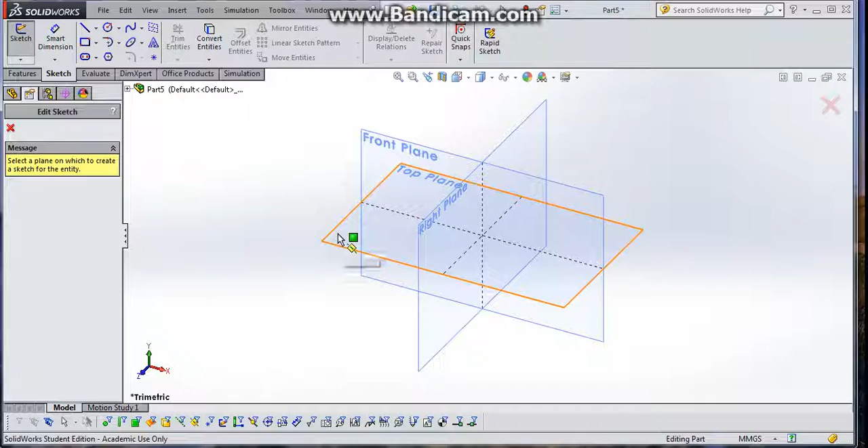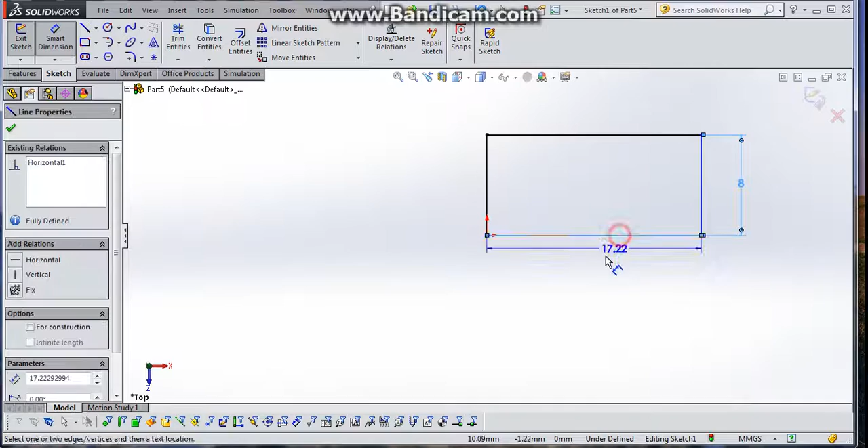We're going to start a new sketch, and we'll sketch on the top plane. We'll start with a rectangle. Corner rectangle is fine. Always have one corner of your rectangle on the origin here. So click, make a rectangle. Use the Smart Dimension tool to make it 8 by 15.8. Exit your sketch.

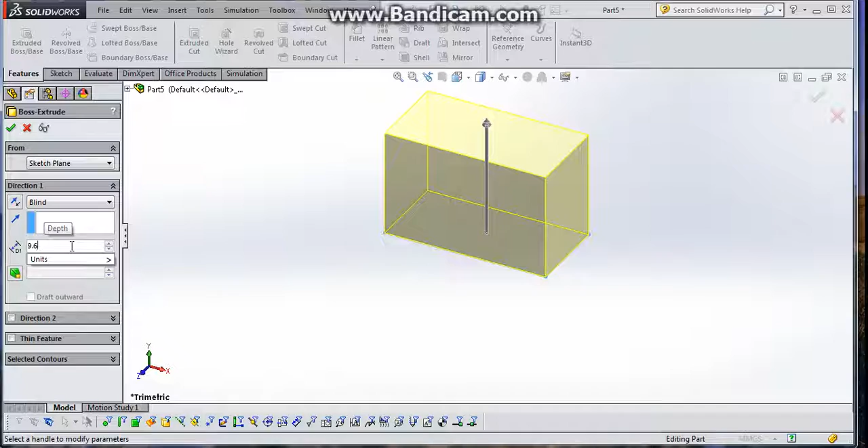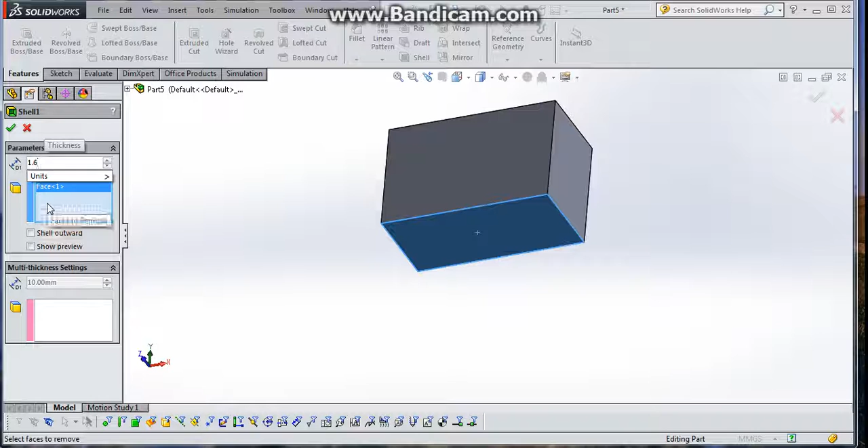We now need to make this into a block, so go to Features, Extruded Boss Base, and this needs to be 9.6 millimeters tall. Now we have our block. We need to shell this, so rotate your model so that you can see the bottom of it. That's the bottom. Use the shell command. Click that bottom face, and the shell thickness is 1.6 millimeters. And you can see it's now been shelled.

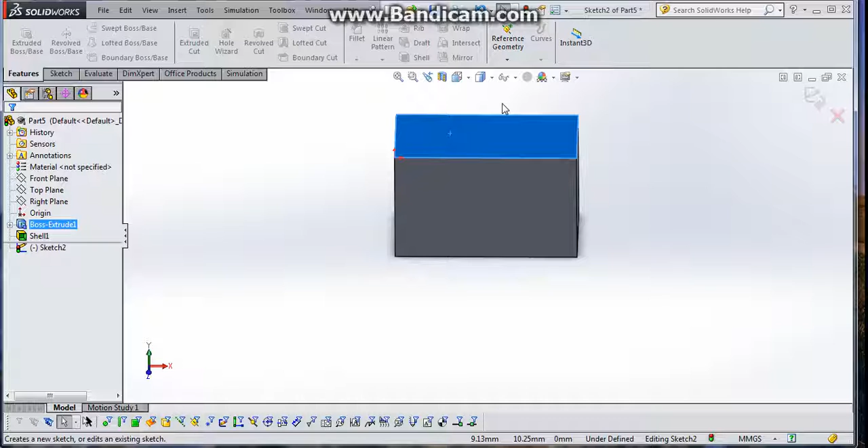Rotate your model again so you can see the top face, and if you click on the top face and choose the sketch option, we're going to make a new sketch on this face. We'd like to be able to see the face straight on, so hold Control and press 8. Now we're looking straight on that face. Go to your Sketch tab and choose the Circle tool. And just put 2 circles on the face.

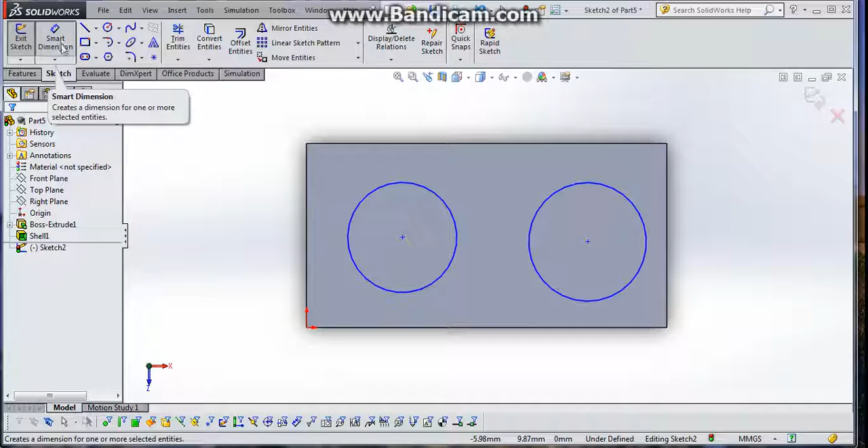We'll now size them so they're the correct size. So use the Smart Dimension tool. Click on both circles and make them 4.9 millimeters in diameter. Again, that's 4.9 millimeters. They need to be 8 millimeters apart. So in order to make that happen, you have to click the first center and the second center and change whatever dimension it is to 8.

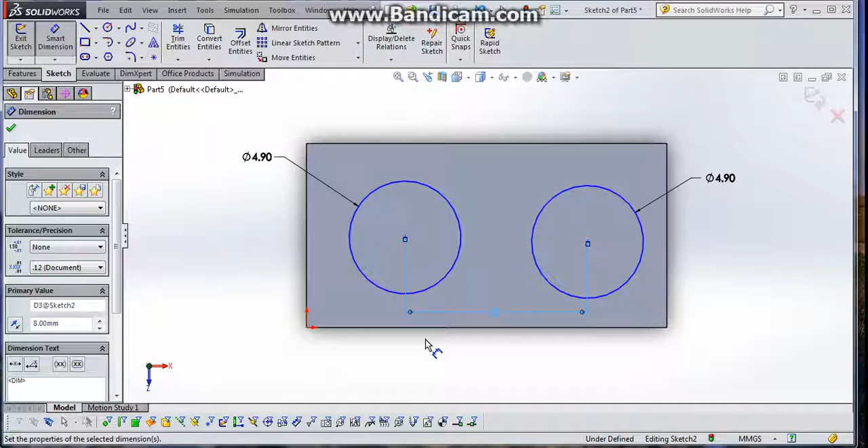Each circle needs to be 3.9 millimeters from the left and right edge. So click the center of the circle, the left edge, and type 3.9. Do the same thing on the other side. It should be forced by default to be 3.9. If you get that error, that's okay, just click cancel.

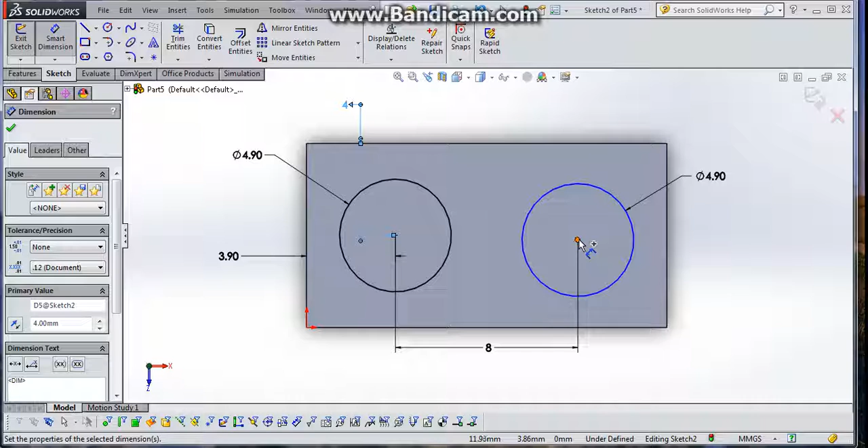And then they need to be 4 millimeters from the top and from the bottom. So click the center of the circle again, the top edge, and make those 4 millimeters. And just check that the other one is also 4. It's not, so change it to 4. Alright, and now we can exit this sketch.

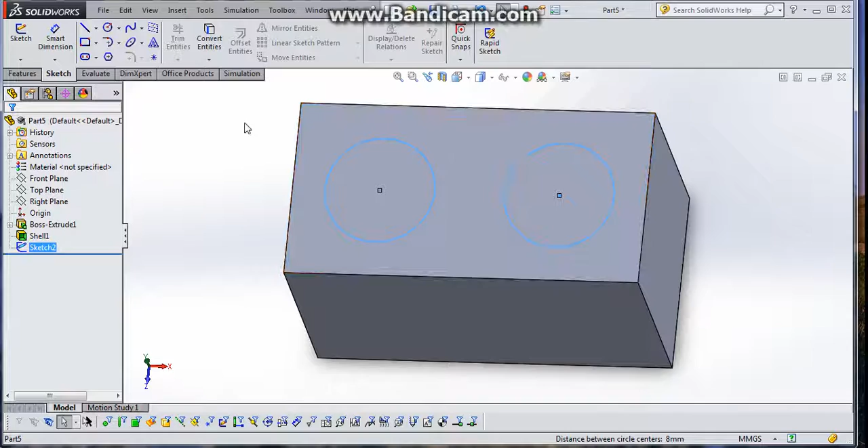We're now going to take those 2 circles and extrude them. So before I click extrude, I'm going to click both circles. You have to hold Control down and click to select both of them. And go to the Features tab, Extruded Boss Base, and we'll make these 1.8 millimeters tall. And now it's really starting to look like a Lego. The only other things that we need to create are some holes on the bottom. So we'll rotate our model so that we can see the underside of the Lego.

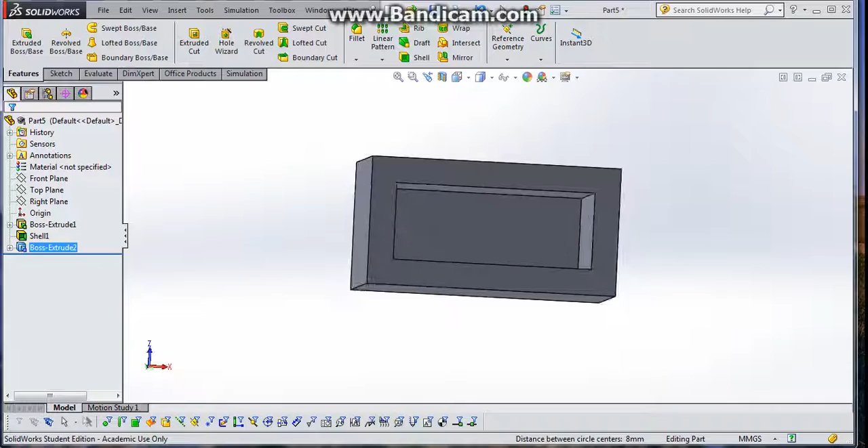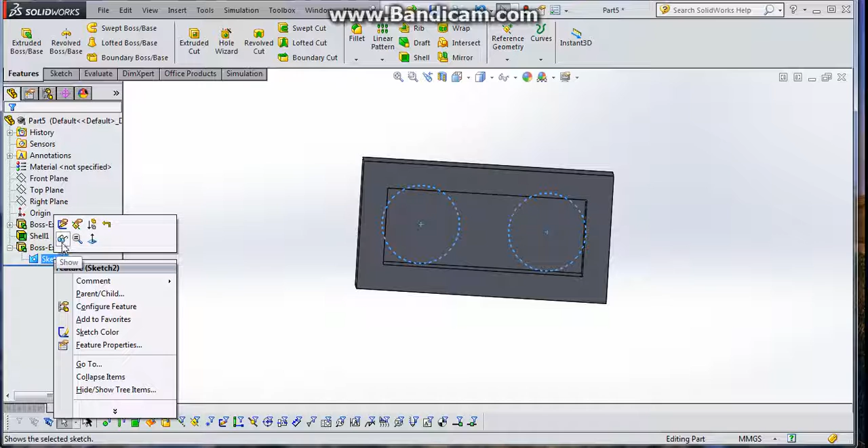And one other thing we want to do is we want to use those circles that we just sketched as reference for this new sketch. So under the Boss Extrude 2 tab, you should see something called Sketch 2. If you right click that and choose the eyeglasses that say Show, it'll make the sketch show up. We want to do that. So Show, and you can now see that those circles have appeared on our model. We're going to make a new sketch on this underside face.

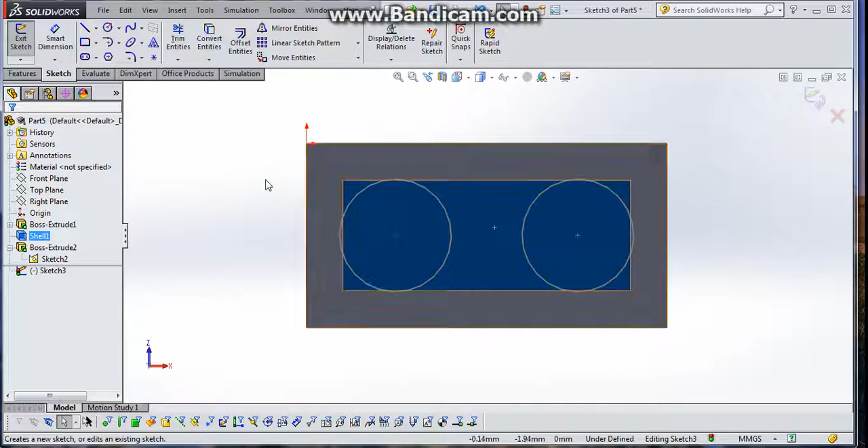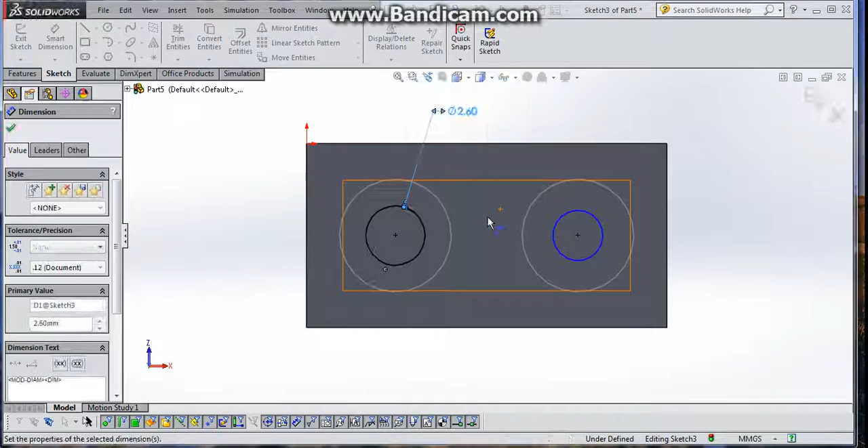We're going to use the centers of those circles as references. So click the circle tool and then go to each of those pre-existing centers and make circles. These should be diameter 2.6. So use the Smart Dimension tool. 2.6. Exit your sketch.

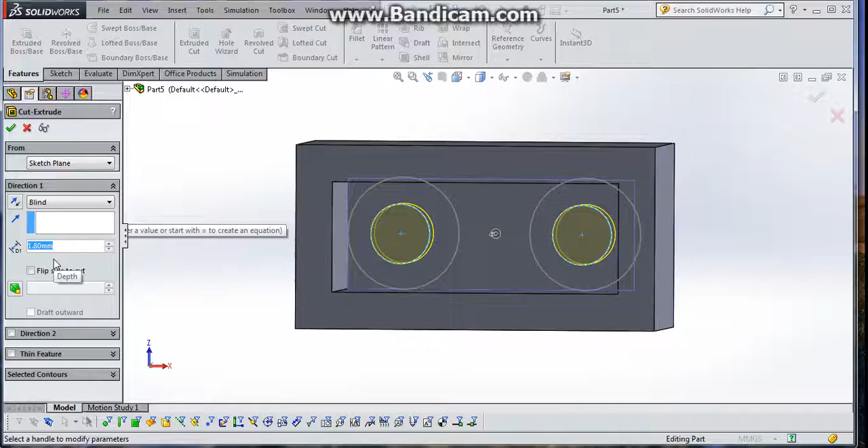And now we're going to cut those a little bit. So Features, Extruded Cut. And you can see that those circles that we just made have been pre-selected. The depth of the cut is 1.7 millimeters. And you can see that there's a little bit of a cut that's occurred.

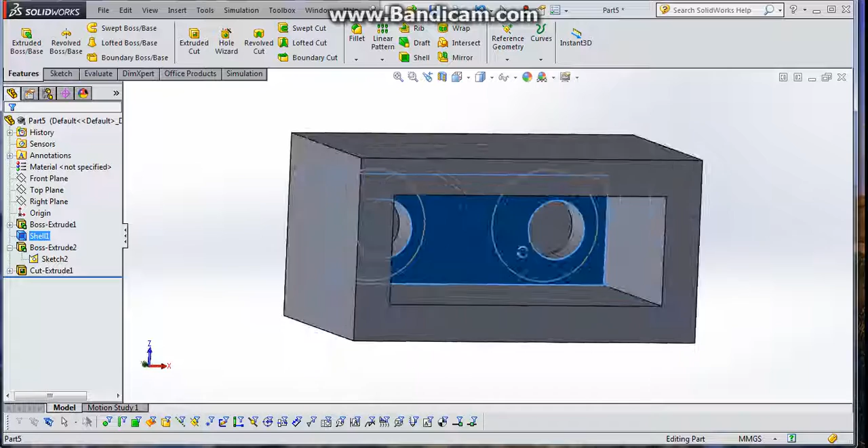The last piece that we need is the post that goes in the middle of the underside of a Lego block. So we will click on that same face that we were just sketching on. That's the underside face. And we'll sketch again, a new sketch. And we need a circle. So we'll just make a generic circle here. It is diameter 3.

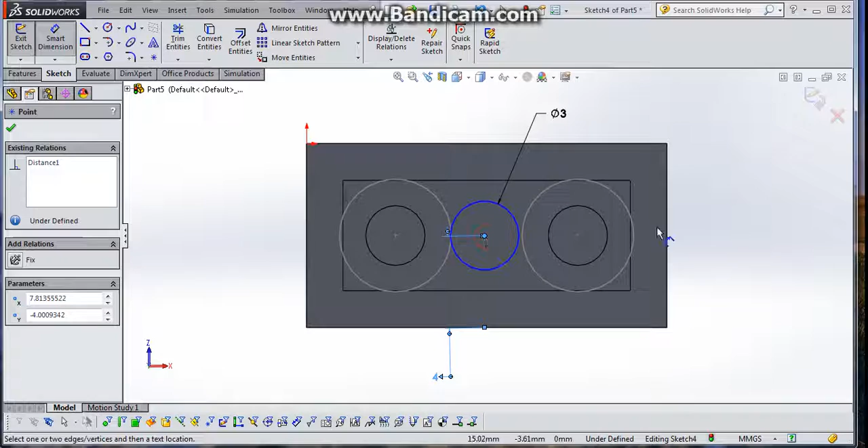It needs to be 4 millimeters from the top and the bottom, and it needs to be 7.9 millimeters from the left and the right. So click the center of the circle, the bottom, and make the dimension 4. And then click the center of the circle and the right and make that dimension 7.9.

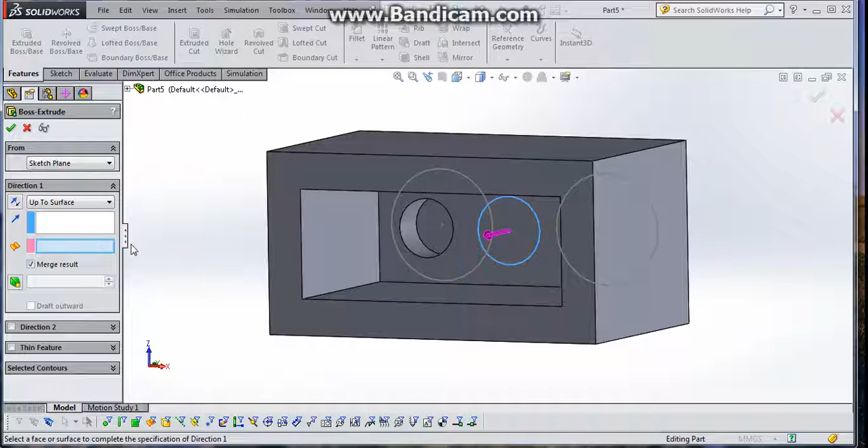Exit your sketch. Go to the Features tab, Extruded Boss Base, and that circle that we just made has been pre-selected. We're going to choose a new type of extrusion now. Instead of telling it how long to extrude, we're going to say extrude it until it stops at this surface. So where it says blind, choose the drop-down menu and choose up to surface, and then click on the surface that you want it to stop at, which is the bottom of the Lego. And then click the green check mark. And you can see that it stops right where this surface begins.

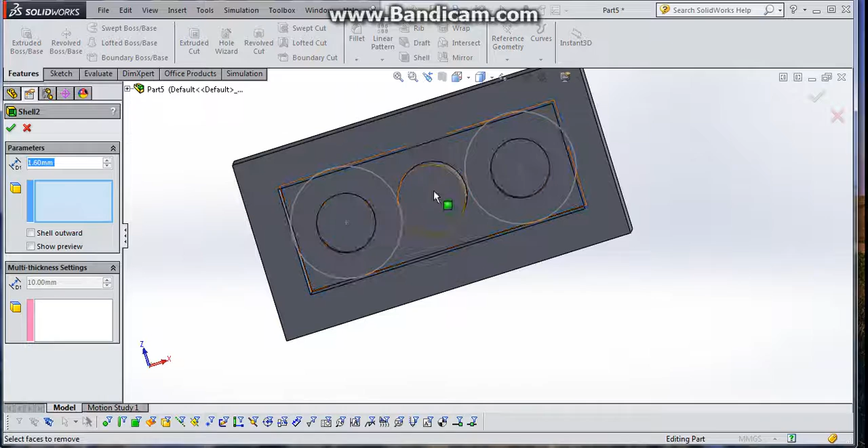The last step is to shell this post. So if you click shell and then click that face, we're going to shell it 0.5 millimeters. And there you have it.

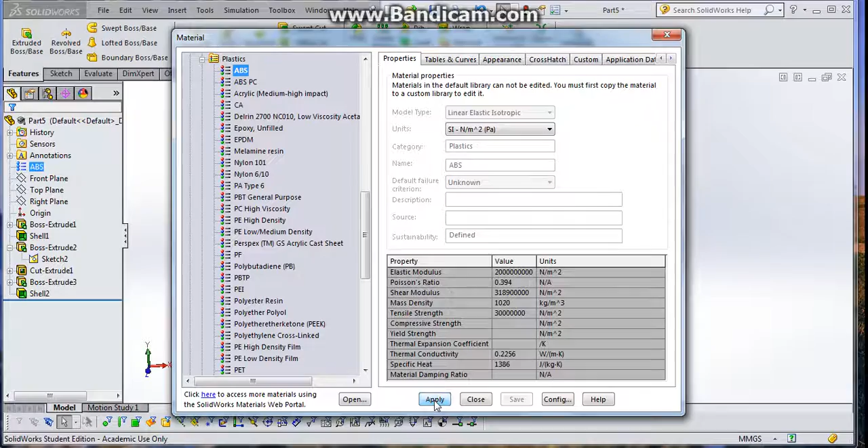Before we finish, let's change the material. So right click, Material, Edit Material, and scroll down until you can see Plastics. Choose the plus sign by Plastics and choose ABS, which should be the first option, and click Apply and then Close. And you can see that your Lego block has changed color. It's now white when it used to be gray.